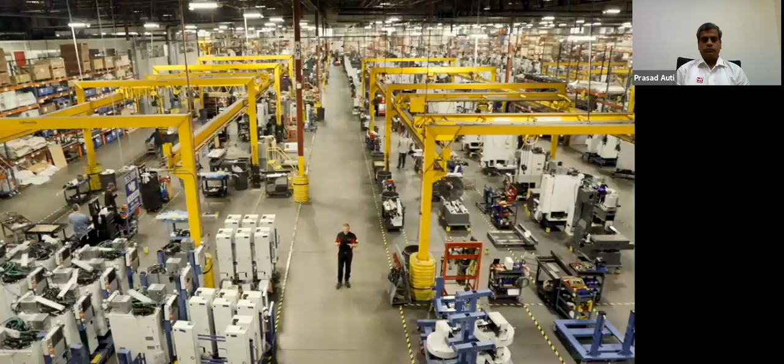On this production line right here, we build our small and medium VMCs. And then we ship them to machine shops and manufacturers on every continent. As one of the world's leading machine tool builders, this factory stays very busy. I'd like to show you how we get it done and why your next machine should be a Haas.

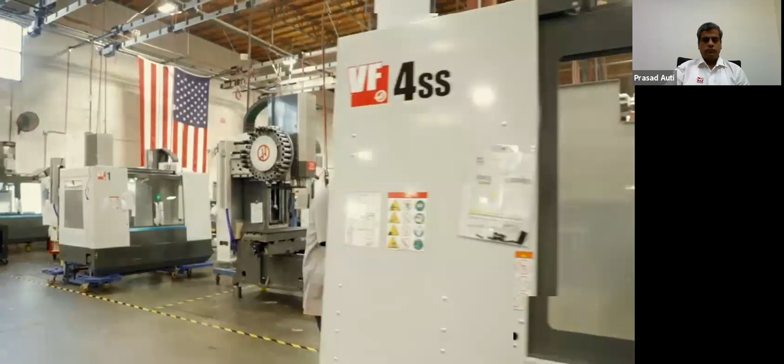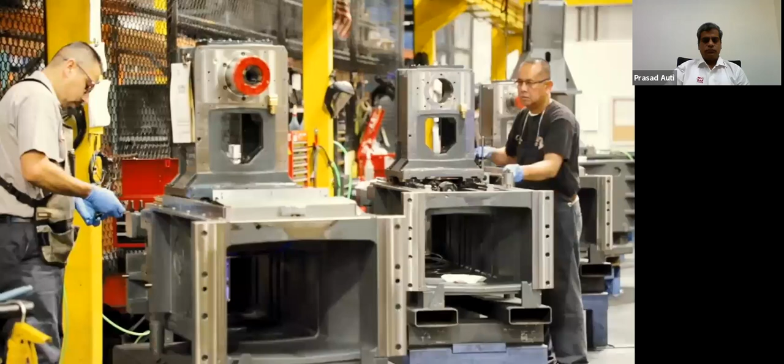So Haas makes a lot of machines. What does this mean for me? It means that nobody is better than Haas Automation at designing and building the machine that's right for you. Each and every machine is built in this single factory in Southern California, and our engineers are literally just feet away from the production floor. When a change needs to happen, they can be on the assembly line instantly implementing those changes. This ensures that the building process is constantly monitored, which allows us to maintain a level of quality that others can't match. Other machine tool builders with multiple factories spread all over the world just can't react as quickly.

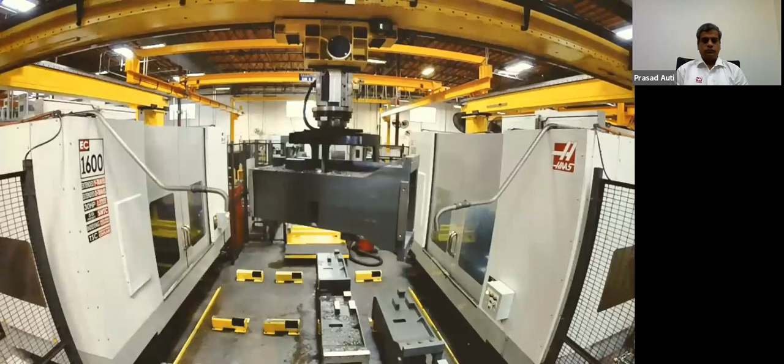So how does Haas build machines? Every critical part is machined right here in our own machine shop by folks that have been doing this for decades. With over 50% of our machine shop using our own machines, we truly have Haas machines making Haas machines.

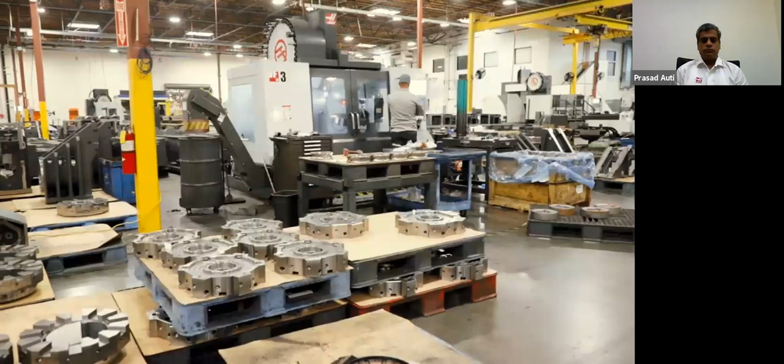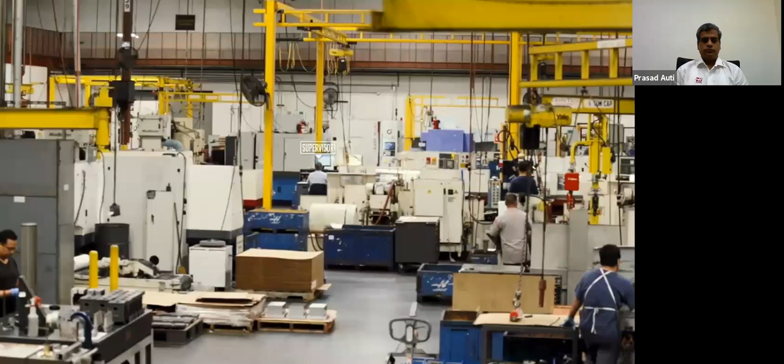Supervisors and managers are out on the floor. These guys don't have desks upstairs in the air conditioning. Issues are identified and attacked immediately, and improvements to the process are always being made by the machinists and builders who are actually doing the work.

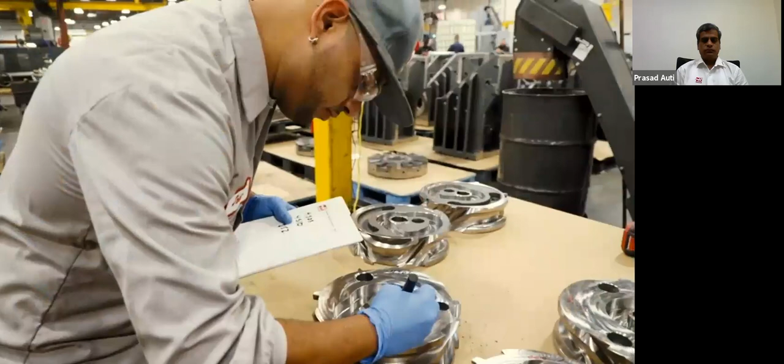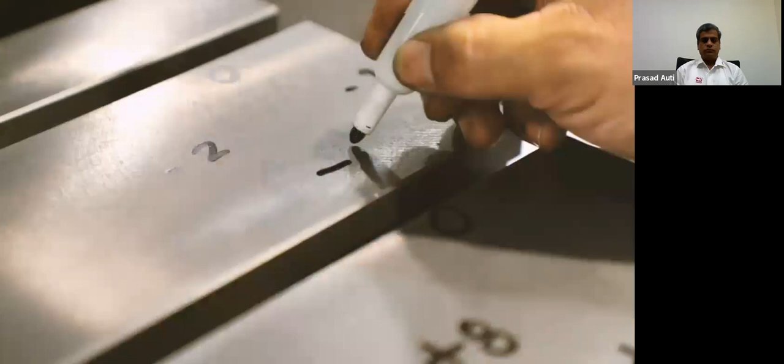The assembly procedures here in the Haas factory follow a very strict protocol, with quality checks made continuously throughout the process. Work instructions and specifications are all communicated to the production floor via iPad. No more paperwork, which might have incorrect or obsolete instructions or specs. If engineering makes a change, when the assembler fires up his iPad, he receives a notification of that change.

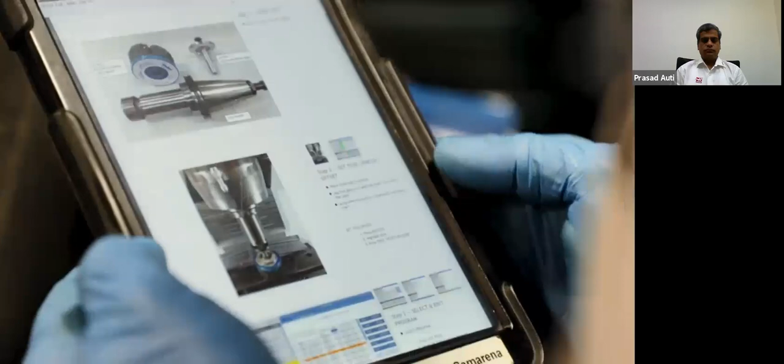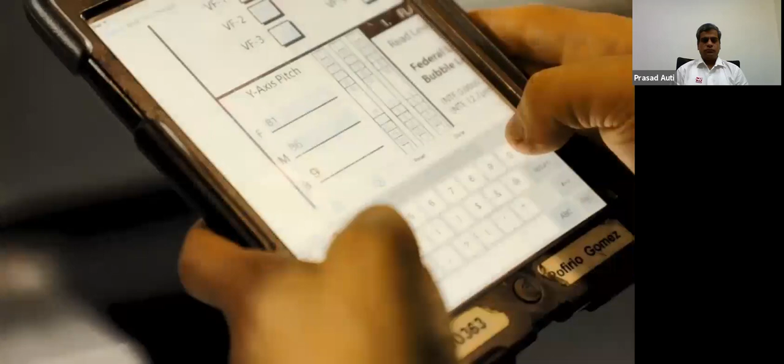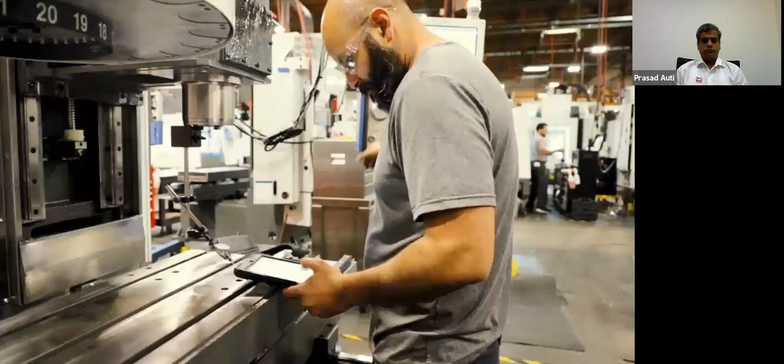But the iPads aren't just for instructions. They also serve to create a live electronic record. Each machine, of course, has a serial number, and as the machine is built, the hundreds of measurements taken by hand are entered into this record, along with the assembler's name and badge number, allowing us to generate a detailed report for every machine coming off our assembly lines. These guys take pride in the machines they build, and the data is there to back it up.

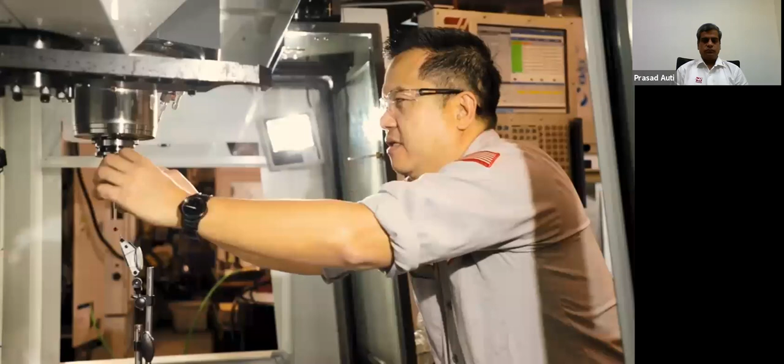What about the components used on Haas machines? Because we build so many machines, we have a huge advantage when it comes to buying power. From linear guides and ball screws, to spindle bearings, to servo motors and vector drives, we don't have to cut corners to provide excellent performance. Great designs and serious volume is how we do it.

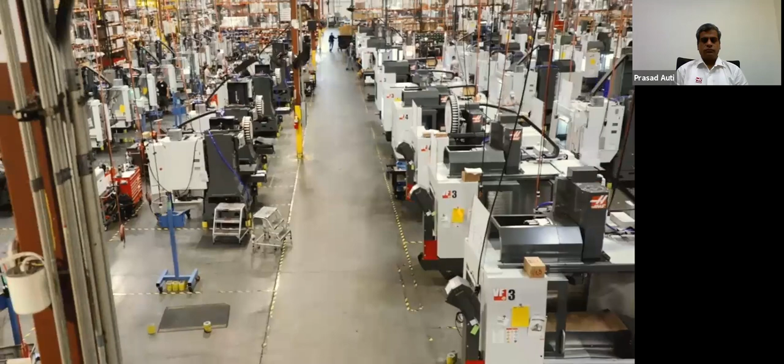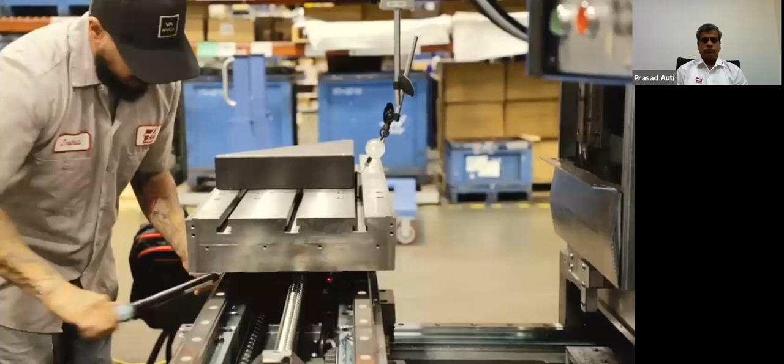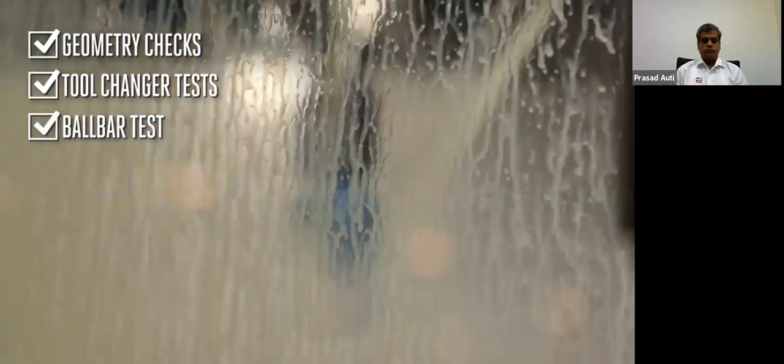How can I be sure of the quality of my machine? In addition to all the quality checks made during the build procedure, each machine has to pass a series of rigorous final inspections before it's signed off as complete. We put it through its paces just like you will when it's sitting on your shop floor. Geometry checks, a tool changer test, a ball bar test to accurately check simultaneous axis motion, a leak test, a vibration check to ensure the spindle is running perfectly, and of course, a final cut test to cap things off.

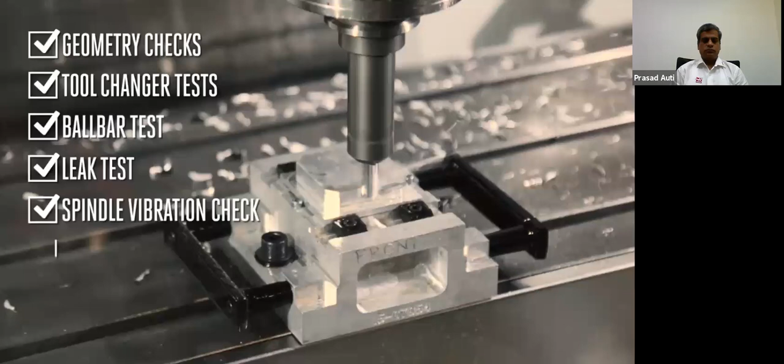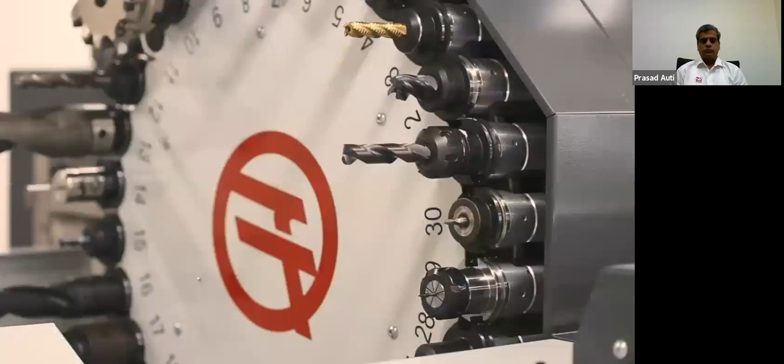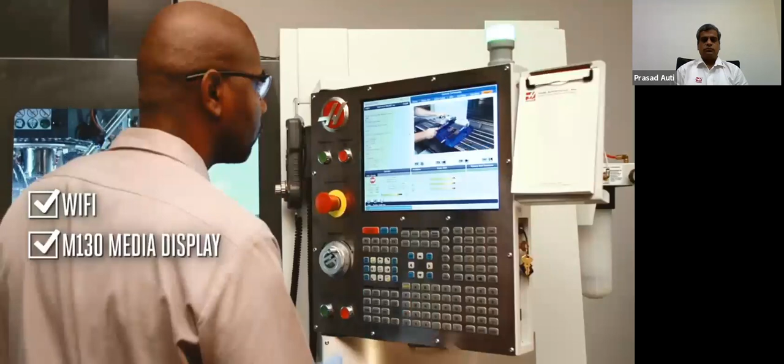Let's talk about this VF2SS, a 12,000 RPM spindle that generates as much as 30 horsepower, a super speed 30 pocket side mount tool changer, and 1400 inch per minute rapids. All of that standard. You also get Wi-Fi, our M130 media display, power failure detection, and Haas Connect machine monitoring, also standard. Every machine is built to order, so you only pay for the options you want.

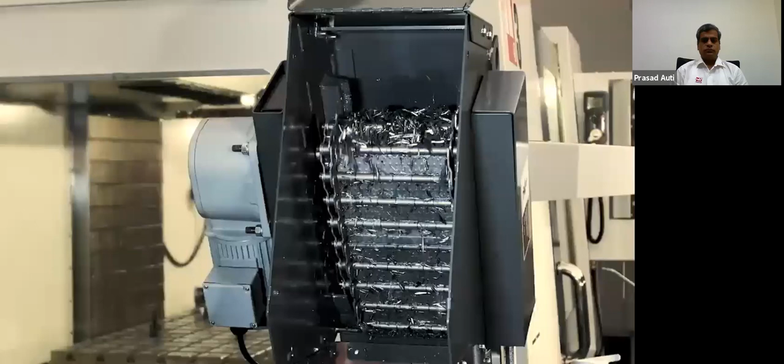And with a wide array of spindles, chip and coolant management options, and the ability to easily turn your 3-axis mill into a 4 or 5-axis machine, you have the choices to customize your machine exactly the way you want. In other words, more machine for your money, and more reasons why your next machine should be a Haas.

So let's talk about the HTEC. That is our first topic today. HTEC is the Haas Technical Education Center. This concept of HTech is based on the idea that manufacturing tomorrow requires education today. This is our concept, which is equally important for students, educators, and also the industry.

Because the booming word now is Industry 4.0. Everybody is talking about it, and that should come into education as well. So the Haas HTech concept highly advocates the concept of futuristic education, and that's what HTech is working on.

HTech has advanced manufacturing labs to boost the careers of students, educators, and nearby industries. The real skills actually required on the manufacturing shop floor, right from design, planning, production, inspection, testing, quality control testing, and improvements in the process. So the complete cycle of manufacturing any product, that is taught in HTech.

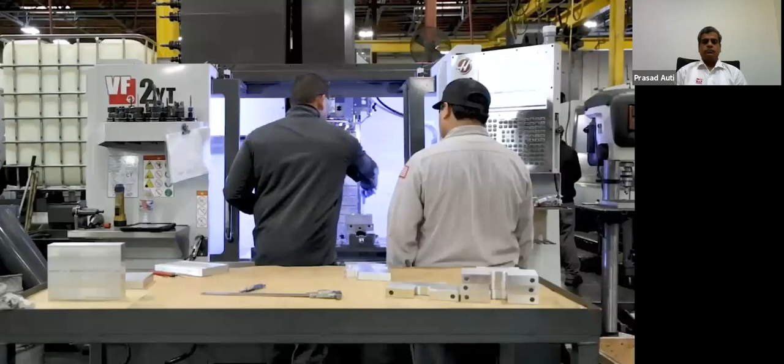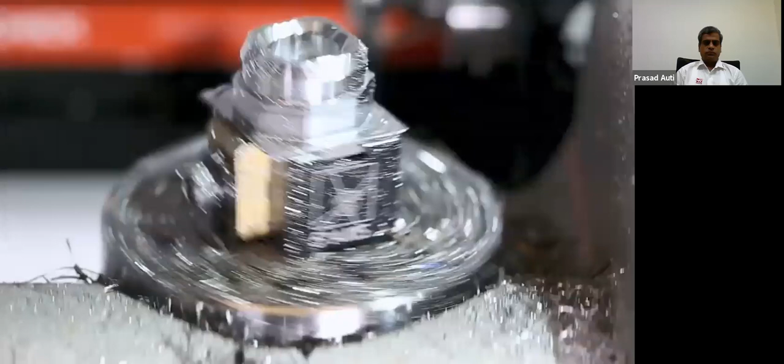If you're in the manufacturing industry, you're already well aware that there's a serious lack of qualified shop help. Haas Automation wants to address that void in the industry with a new free program that will help give those interested in CNC machining a good starting point to becoming a competent machine operator. Introducing the Haas Operator Certification Program.

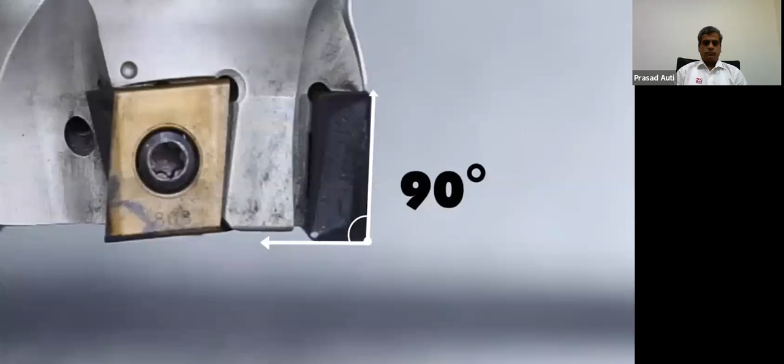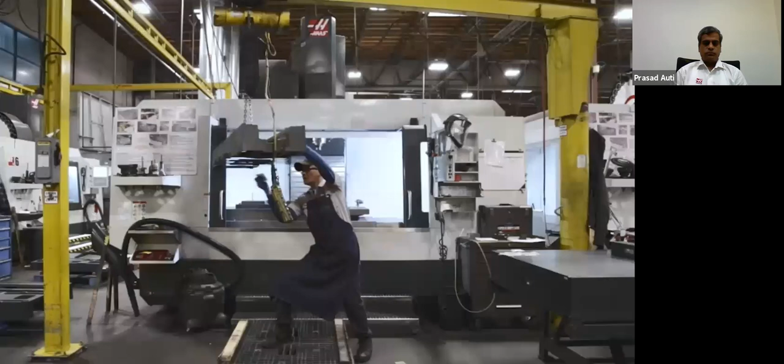Whether you are a machine shop owner looking for help, or you have an interest in running a CNC machine, the Haas Certification Program is for you. It is a free online curriculum designed to teach the basics of manufacturing and working in a CNC machine shop. Starting with Basic Operator, a series of videos and quizzes guide you through the basics of working in a machine shop.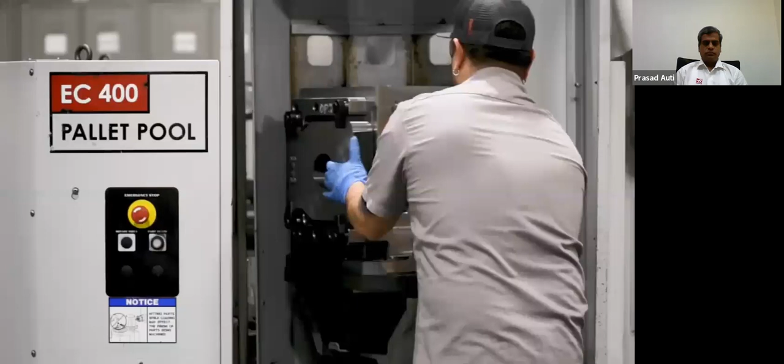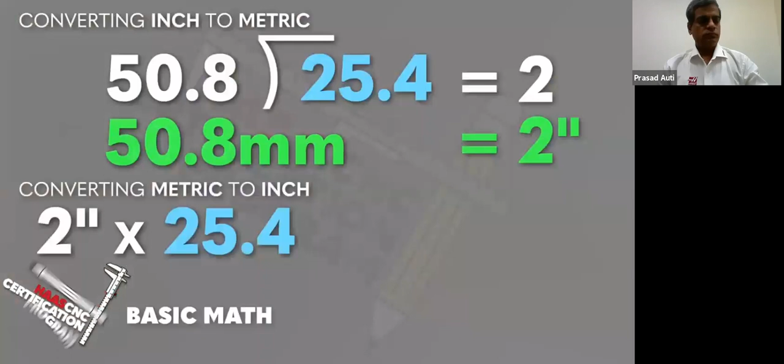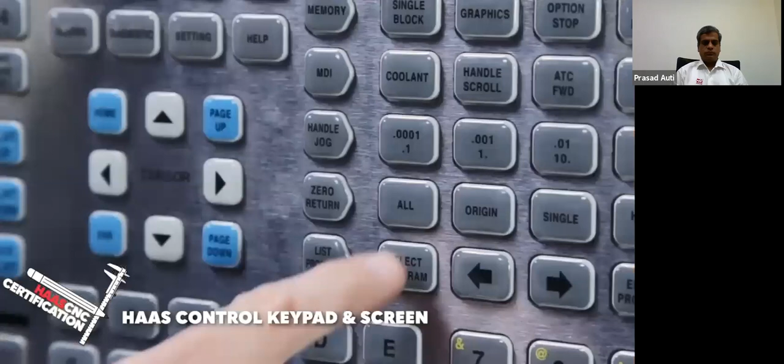Heavily emphasizing safety, we present simple but thorough discussions of topics like the history of CNC machines, basic shop math, understanding machine shop terminology, how to read a blueprint and understand tolerances, the keypad layout on a Haas control, how to load and unload a part from a vise safely and effectively, and much more.

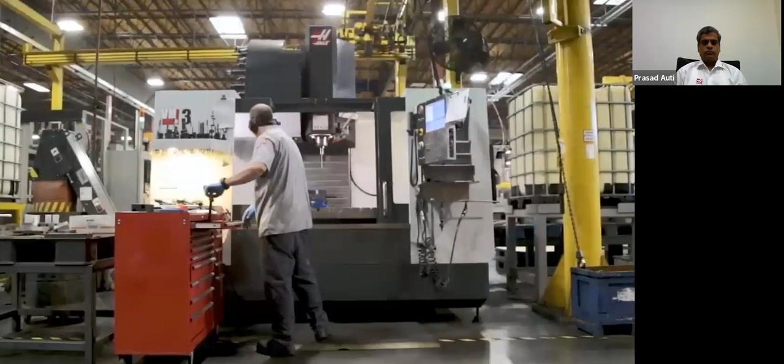After passing the online training, a hands-on test at a Haas factory outlet will help ensure that the skills learned online translate into real life. Once passed, the student will receive a certificate to show that the course has been completed, and this should help them begin the journey into the manufacturing world with a job in a CNC shop. The Haas Certification Program—another reason why Haas Automation is a leader in the CNC industry.

So what are the career options available? On the left, we have listed all the industries which we are supporting in manufacturing: Additive manufacturing, that is 3D printing. Aerospace, that is aeronautical engineering and space. Automation, that is robotics and automation. Automobile, including electric vehicles. Defense, meaning both government and private industries.

Die mold, which is a core industry supporting all the other industries. Energy, that is renewable and traditional energy setups. Engineering consultancy, where one can start his own consultancy or work with reputed consultancy firms. Forging and casting, an industry with a very historical background. Jewelry, a very precision-based and valuable industry.

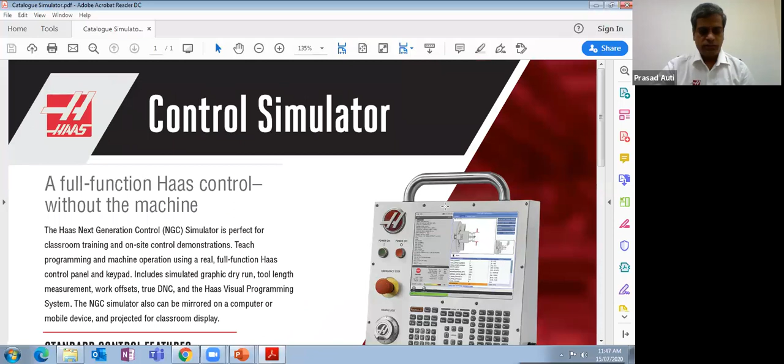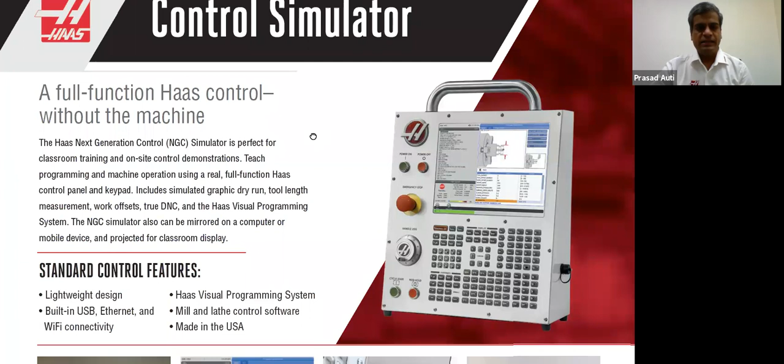So this is the simulator, since a number of questions are coming, I would like to show this simulator on screen. It's a full function Haas control without the machine. The first line is described, and the beauty of this simulator is that the same machine front panel is installed on all Haas machines. This simulator has all 3-axis milling, 5-axis milling, HMC, and even the turn-mill center with Y-axis.

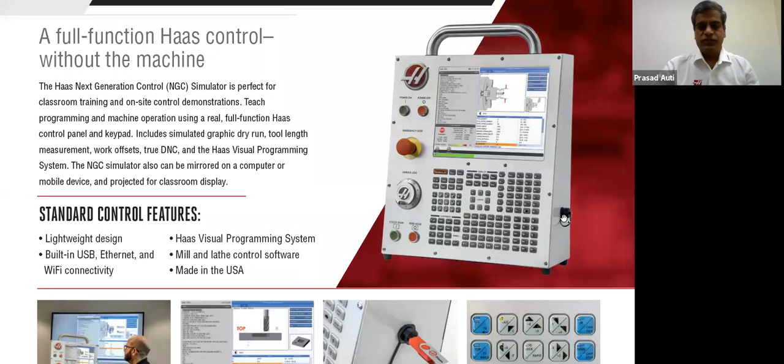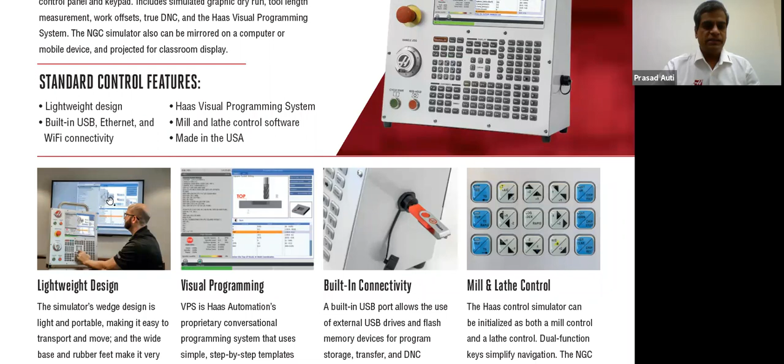Normal turning, 2-axis turning, turning with live tool, turning with C-axis and live tool, and turn-mill center with Y-axis. Even the Haas UMC, that is simultaneous 5-axis machining software — all the softwares are included in one control. It has a USB port on the right; you can transfer the program via USB and run it on an actual Haas machine. The beauty of this control is, as shown below, you can connect it through Wi-Fi or Ethernet to a big screen, which is very good for classroom training.

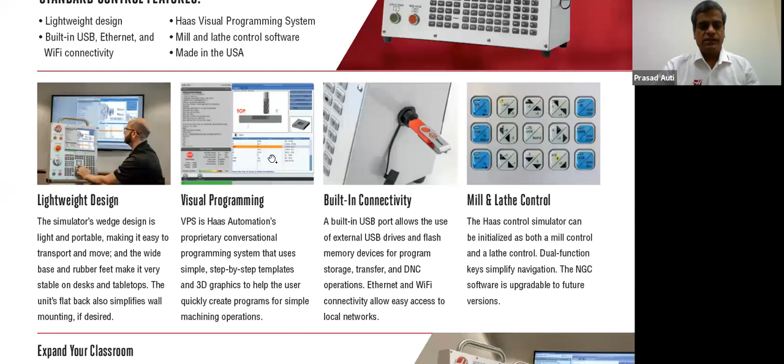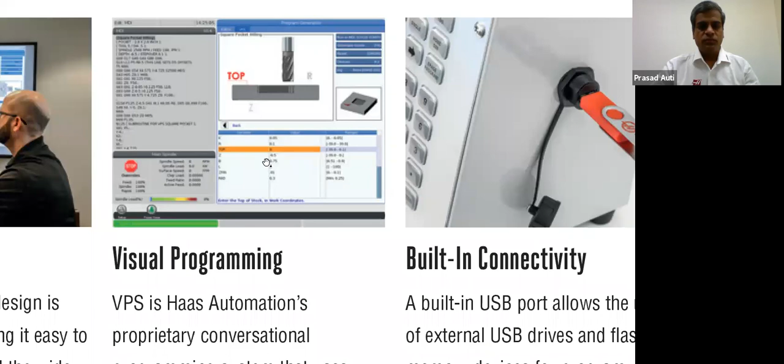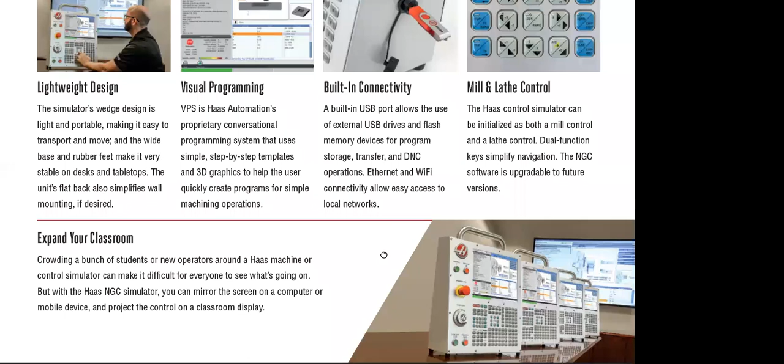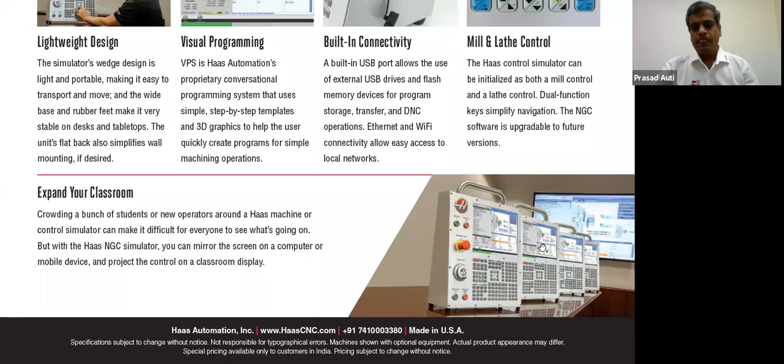Another feature is VPS, that is Visual Programming System, so beginners can use this VPS system — they just need to fill in the blanks and the complete program is available. USB connectivity is available, and it's a common control for mill and lathe; the simulator supports both technologies. You can have a number of simulators, and even one or two students can work together on one simulator for classroom training. So this is the simulator.

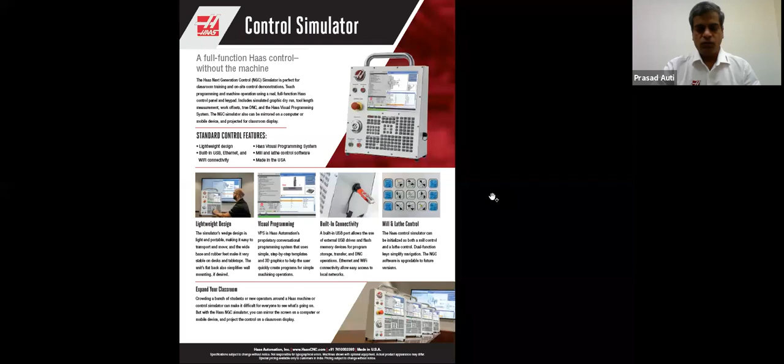Haas is very liberal in sharing knowledge. It's not behind walls, it's open knowledge, and you can download the troubleshooting guides, machine manuals, and how-to procedures. For simple things, you need not have a certified Haas engineer come to your facility. You can just watch the video, follow the procedure and documentation, and do it yourself.